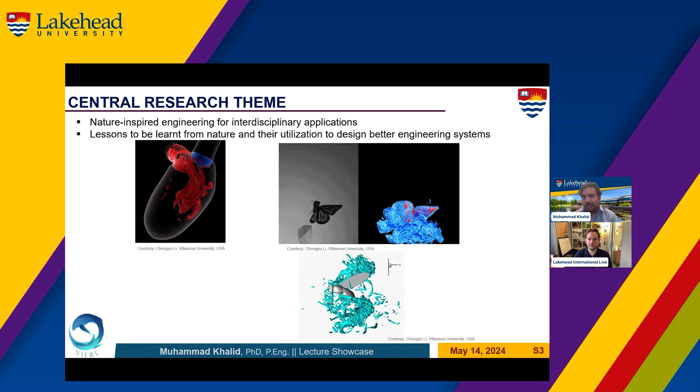And then you can see how we are looking at the aerodynamics of a butterfly, how it flies. At the same time, you can see a bee, how well it controls the vortex dynamics around it. The flow structures are very important to control to produce those necessary forces, which I would explain by taking an

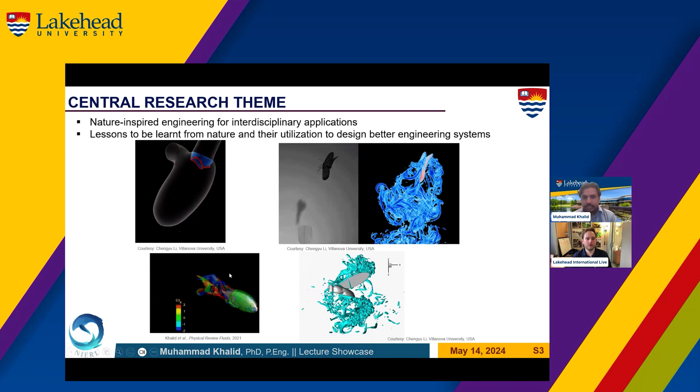example of a fish. And this is basically my work, which I'm showing you as a sample, where a fish is shedding some flow structures in the wake to produce the necessary forces. I would take this example to further go into my lecture.

So my story, how I went into this whole nature-inspired engineering thing, started with beetles and bugs. Back in 2011 or 2012, in the summer, I was a PhD student, and my advisor asked me to find a good research topic which has an impact on engineering systems in future. I kept thinking about different things, and I couldn't come up with anything for weeks and weeks.

And one day when I was entering the university where I was doing my PhD in Pakistan, I saw this beetle and I went after it. I was chasing this beetle for an hour or so just to make sure that whatever I observed is correct. The observation was that this beetle has its flapping wings, if you can see my cursor, under rigid wings.

And my observation was: how come this beetle can fly with two rigid wings with such a small weight? These rigid wings are not moving at a higher frequency, but these membranous, flexible wings are moving with a higher amplitude, with a more prominent motion. So I went after that, and I thought, this is a great PhD topic.

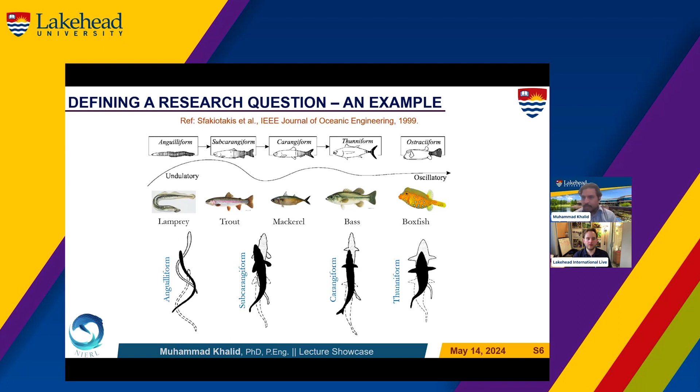And the second important question for me was: can we design a bio-inspired vehicle or bio-inspired underwater robot which can actually surpass the hydrodynamic performance of these fish? So in order to understand this thing, we have to study the fish first, right? So that is one example.

So I observed that thing. I had that question in my mind. And then I followed a scientific method. In the scientific method, first we have an observation. And that observation gives us certain questions in our mind. And then that basically leads us to a certain hypothesis. So you see, we have a specific research aim in our mind.

And in order to understand it further and find its answer, we either perform experiments or we do simulations, right? And after doing that, we draw some conclusions. So this is how we follow the whole scientific process in our teaching, in our research. And after having the conclusions, in order to make further improvements, we go into another question. So this cycle continues in the life of an engineer or a researcher.

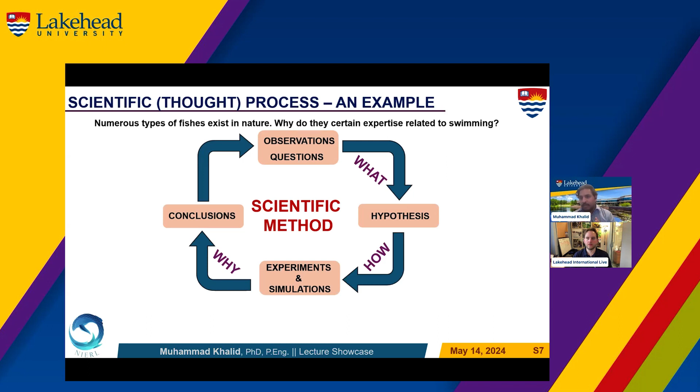So I would give you an example based on what I have just discussed on the previous slide. For observation and questions, I had this in mind: there are so many fish in nature. Why do they have certain expertise, physiologies and kinematics or motion, which make them great swimmers? So I made a hypothesis. I said, are the physiology and kinematics of different fish connected? So that was a research question in my mind.

And I try to find that answer through my integrated experimental computational approach. I would perform some experiments, and then I would also perform some computations in order to find the answers for my questions. And I came to a conclusion where I said, yes, there is a method to this madness, you see? The fish has gone through this whole evolution process to have a certain physiology, and they move according to what suits their hydrodynamics.

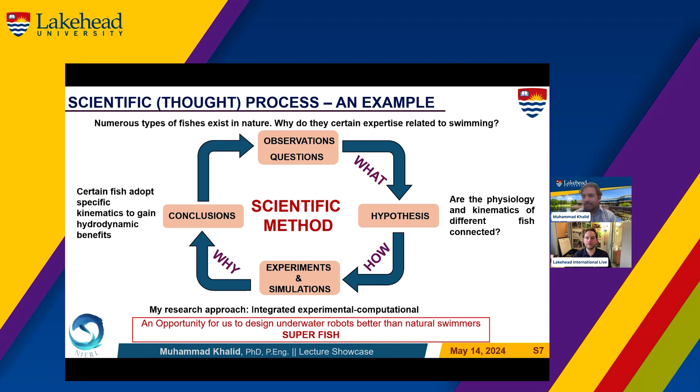So I would explain that this knowledge is very important for us to design a superior bio-inspired underwater robot, which I call a superfish. And as I say, sometimes we have to go for experimental approaches. Sometimes we have to go for computational approaches. And computational and experimental approaches have their own benefits.

For example, experiments are real time, more natural, and give us understanding about the system without making any scientific assumptions. But there are limitations. For example, I cannot tell the fish, can you please swim like an eel now, and at the other instant, can you please swim like a trout now, so that I understand what you are doing with the flow. So I cannot do that, you see.

So I have to go for computational approaches where I can describe any material properties for any system. I can describe any sort of motion or any sort of physiology. So my approach is that I would adopt experiments whenever I need to, and I would switch to simulations whenever I need to. The biggest thing is that we can really provide a deep insight into the behavior of the system using both approaches.

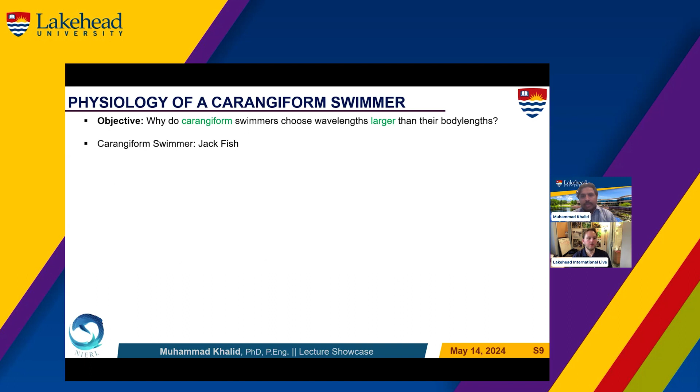So here is an example. We got this high-speed image reconstruction data for a jackfish from collaborators at Harvard University and University of Virginia. And then we reconstructed its whole geometry and its whole kinematics. And this is our solver. You can see, this is a virtual water tunnel, you can say. And we ran those simulations on a supercomputer.

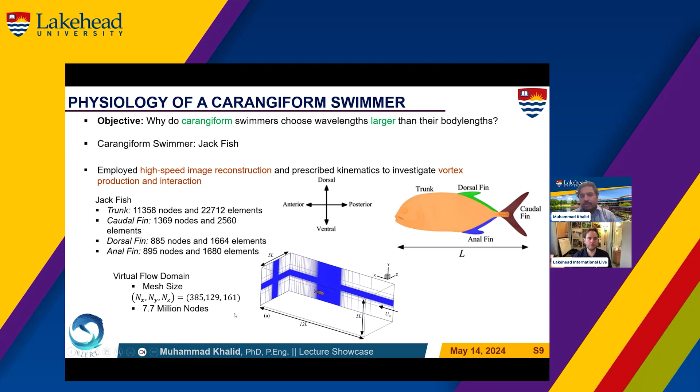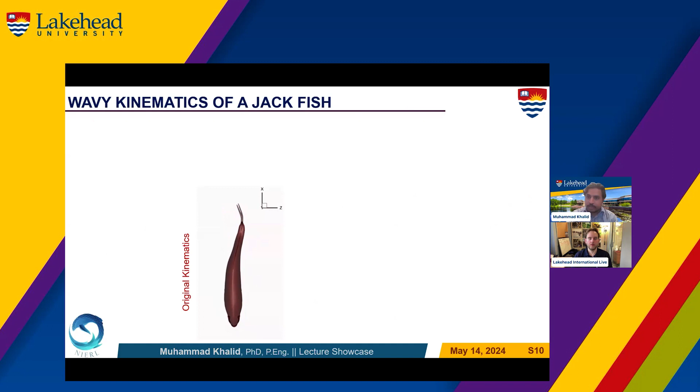And this is the original kinematics. And in order to change its kinematics, I have to follow a certain mathematical equation, right? So we have developed this mathematical equation. And based on this equation, you see here, for a certain wavelength, this fish following the mathematical expression exactly copies in its motion what we see in reality, right?

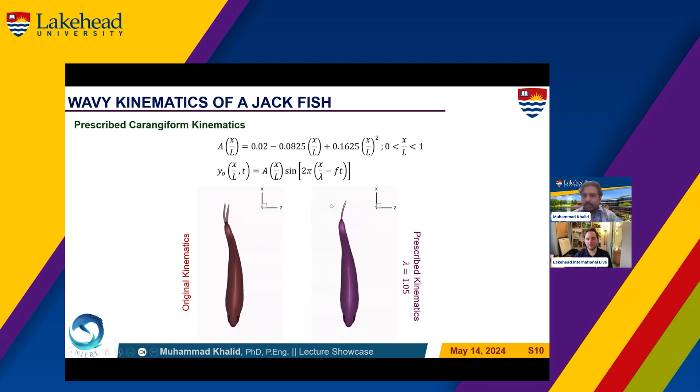So now it gives me the opportunity to change different parameters in those mathematical equations and see the behavior. So in order to convince the community that my mathematical expression actually works, I don't just need to look into it. I have to compare the two things.

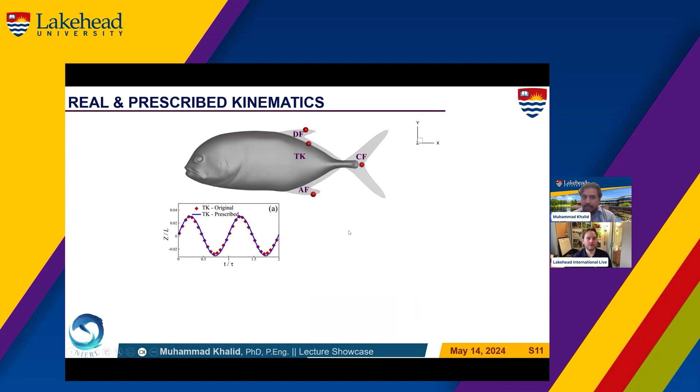For example, you see those 4 different points, and I'm seeing the motion with respect to time of those 4 different types, which I get from the reality, a real case, and which I get from the prescribed motion. So you see, we are matching the performance. So in terms of a mathematical model for the motion of the fish, it's very accurate.

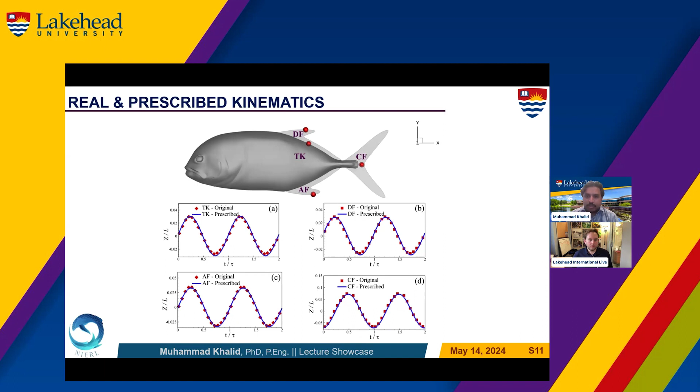So you see, I'm changing the wavelength of the fish, and I want to see why it is having this wavelength in reality. Does it give it some sort of hydrodynamic advantage? This is what I want to see. So we have basically looked into its thrust production capacities and the drag forces which it experiences when it swims.

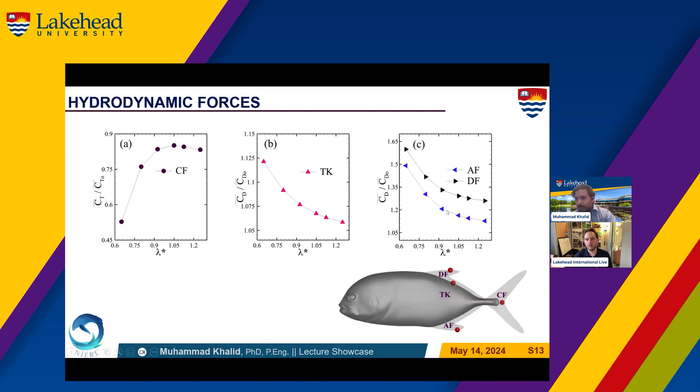So it means that nature is already providing us some sort of optimal solution in terms of connection between physiology and kinematics. So this is what basically inspires a natural design. At the same time, here I am looking at drag of the main trunk. I'm looking at the drag of the anal fin and the dorsal fin. And we are analyzing all their data to get some conclusions.

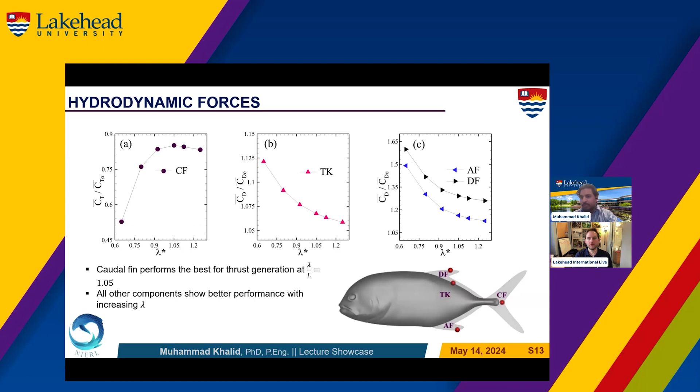And the conclusions are that the tail of the fish, which is known as the caudal fin, performs the best for thrust. And all other components, their drag reduces as this fish increases its wavelength. So it means that the fish has actually learned some lessons from that evolutionary process according to its physiology.

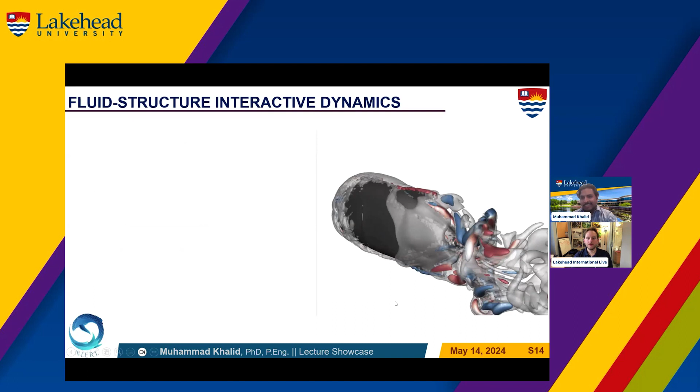So I'm just showing you the animation which we reconstructed from these simulations, and you can see all the flow structures around it. And those flow structures, I can tell you, the fish is expert in controlling all the big and small flow structures. And just to see what we extracted out of it as a researcher and engineer, I'm showing you one glimpse of what we studied for each flow structure here.

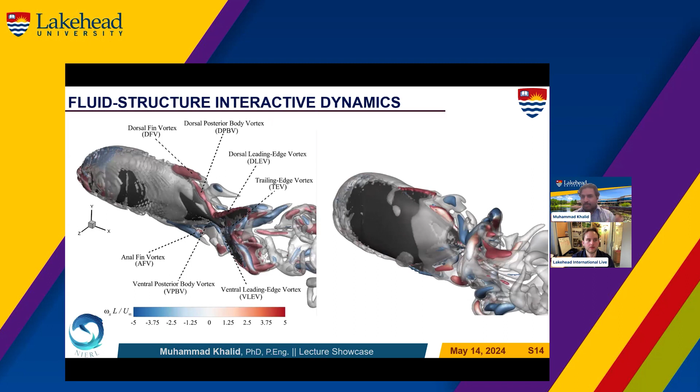So you see, we are looking at all those flow structures separately, and we are seeing how they are interacting with each other, how they are producing different sorts of forces, why they are going into a certain kind of sync with each other. So, I mean, this is the whole engineering approach which we followed over there.

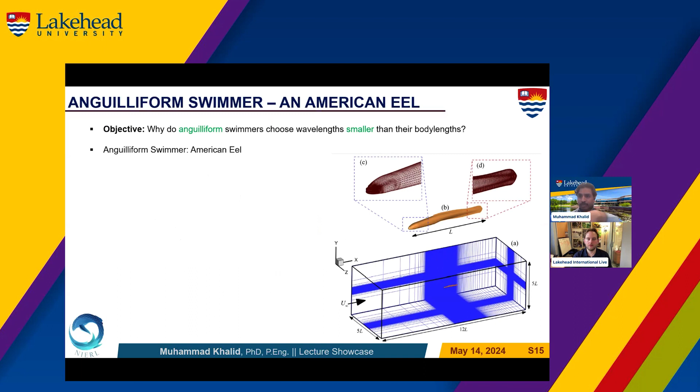We have also done the same thing for another kind of swimmer, which is an anguilliform swimmer. And now the example is an eel, which is like a snake. And the eel is very different from the previous fish because here the eel is using a very low wavelength as compared to its body length. So we also looked into this and we ran its simulations using a similar kind of mathematical equation which I showed for the previous fish.

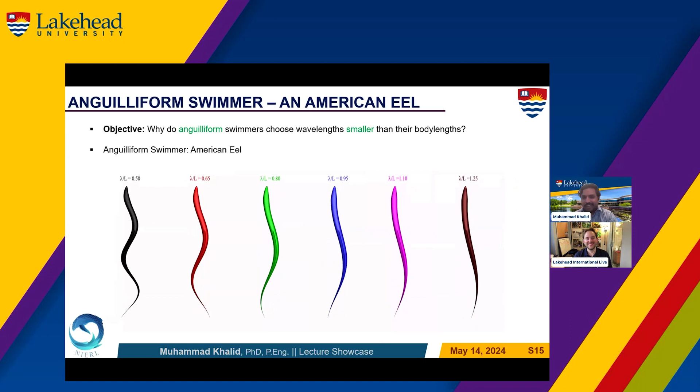I changed the wavelength, and remember that this luxury is not available to me in experiments. So we have run those simulations and we came up with the conclusion that the eel would swim with a lower wavelength because its physiology suits that kinematics in terms of producing more hydrodynamic advantages. Similarly, I have shown you the vortex structures for the previous fish. We have actually studied the vortex structure production for different wavelengths for this fish as well. So this is basically what engineering analysis in terms of propulsion is.

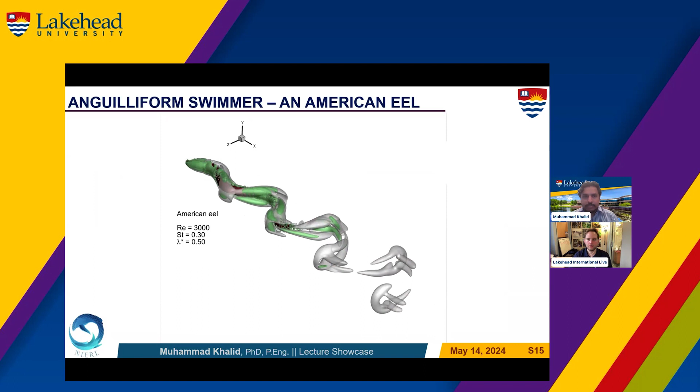We are also working on developing a manta ray bot at Lakehead University, and the work I'm going to show you now was done by a group of undergrad students with me in their capstone design project. They have just graduated. So you see, this is a manta ray, and we wanted to develop that manta ray bot.

So we are running some simulations. We are reconstructing the whole thing, the motion of the wing. So you see, we are reconstructing it into a simulation environment, and we are trying to understand how many forces are required or how strong the fin should be to push water from its wings, right?

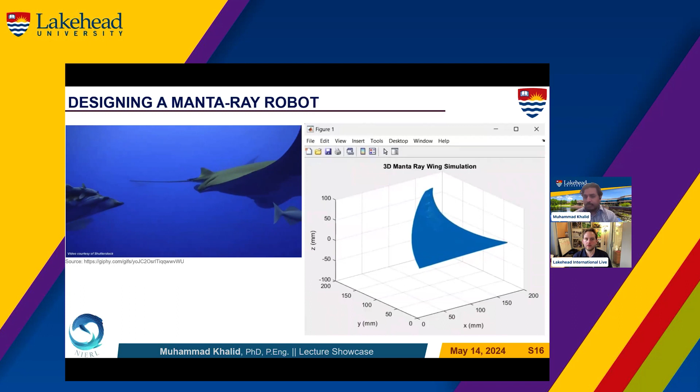And then we are looking at different, I would say, not very sophisticated experiments to produce that manta ray bot. These are the 3D printed parts, which we came up with after some conceptualization. And then you can see a not very sophisticated experiment. We could understand how much stress needs to be there and how strong the material should be for this robot, right? So we came up with our experiments in terms of converting weights into quantifying the stresses, and we came up with a factor of safety of 7.45 for our robot.

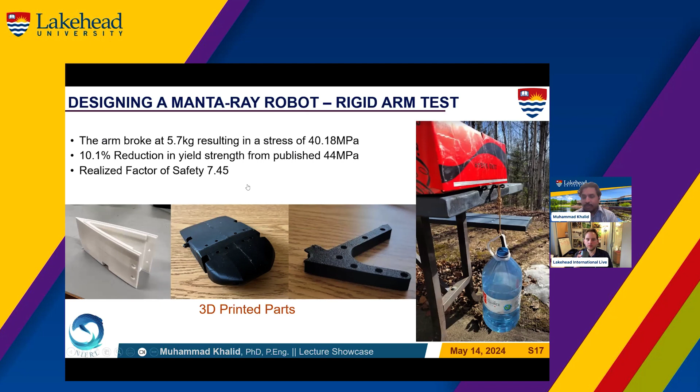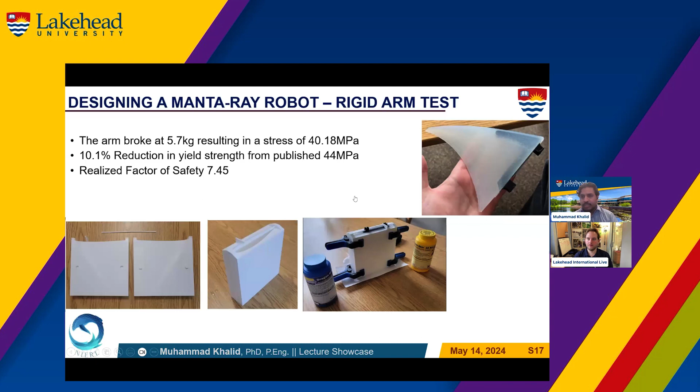And these are the wings, which were produced by the 3D prints of a mold. You can see the mold over there. And we have selected the geometry based on a real manta ray. We just scaled it down. And this is the final product which they made. And we just tested it in a pool as well. So we made a short video and it was running fine.

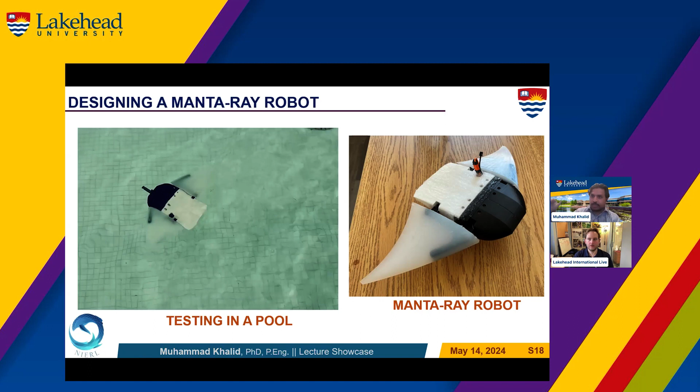But the biggest problem now as mechanical engineers for us was how to communicate with the robot when it goes underwater. So this is what we need to figure out next year. So anyways, this gives us some confidence that the approach which we followed worked in terms of producing propulsion with the required characteristics. I'll pause here.

So Dr. Khalid, we have a few questions before we get too far away from your discussion related to the fish and how they swim. The first one was, where do you do simulations, the experiments you talked about that are actually done with real fish versus computational ones? Is there a lab on campus, or do you go outdoors to a lab, or are there facilities that you or your colleagues use?

Yeah. So in terms of computational solver, we have developed our own solver that is in-house. I would show you another example when I talk about the energy harvesting part of this lecture. That solver is in-house, it is fully parallelized, and we run our simulations on Compute Canada facilities managed by the Digital Research Alliance of Canada. All my students in the lab are trained on using and developing that software. We are actually developing different modules of it.

In terms of getting those experiments, as far as the robot experiment is concerned, that is something which we do by ourselves. But to get that high-speed data, we have collaborations in different countries. So we don't need to do everything by ourselves. This is why we build partnerships, right? And this is what adds much more strength to our program. The experimental data is obtained from our collaborators, and the computational environment, yes, that is run with our own code.

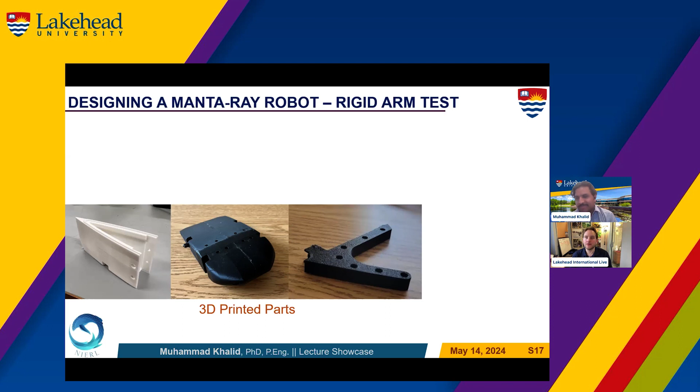It comes back to something you said at the very beginning of the webinar, making sure that everyone's approach is multidisciplinary. Yes. It's not just a mechanical and mechatronics engineering individual working on a single research project. It's a team of collaborators that are bringing their wealth of knowledge and expertise.

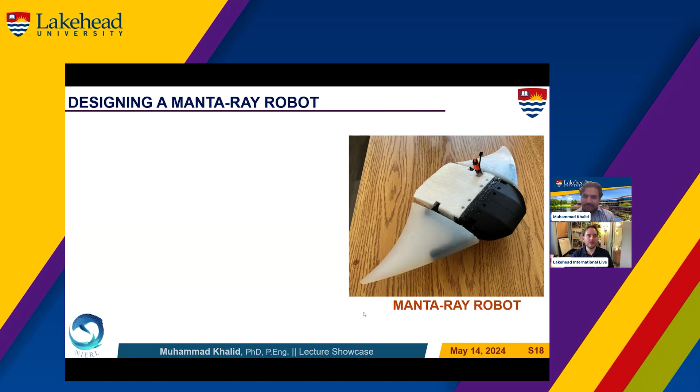Exactly. There's one more question in here, but I'm going to save it because I think it's going to be really interesting to be answered after you share a bit more about nature-inspired and energy harvesting. So I'll let you continue on in the PowerPoint you've developed so far. Sure. Thank you.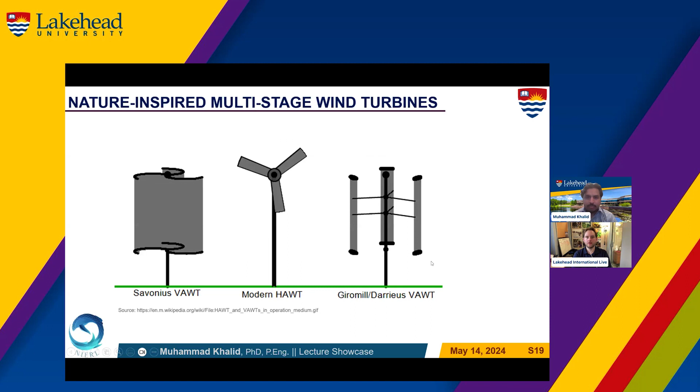So we are working on a very important problem related to the vertical axis wind turbine, the third one, at the rightmost position. There is a bigger problem related to this wind turbine, and it relates to its self-starting capability. Most of the time, people would have to attach some sort of pushing mechanism to make that turbine run, and then it would be able to produce some power.

So we want to understand how this turbine interacts with the incoming air so that we can improve its self-starting ability, and we are looking into that using our computational approach. In terms of answering that question, I would get back to the fish school. Here we are seeing a side view of a fish school. Whenever fish move in those configurations, they move really fast. If you look at their rotational speed, they move really fast.

So I thought, we can have the same concept and introduce something like a multi-stage wind turbine, where we have added another set of rotors within the primary rotor. And we performed simulations, looking at how different flow structures are produced by different configurations of vertical axis wind turbine, and whether having another circular arrangement of rotors inside the primary rotor can improve its self-starting performance.

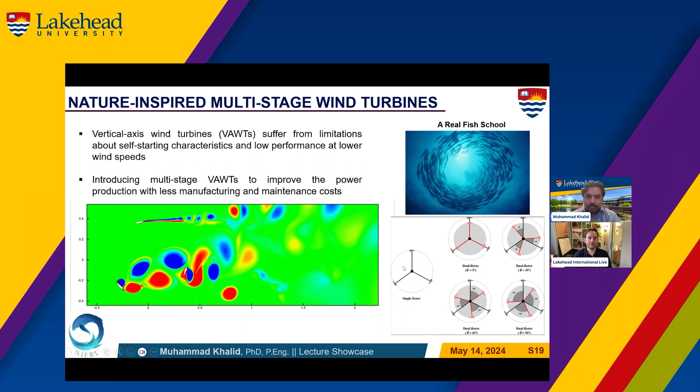Because of the time constraint, I would not go into the results, but I can show you one animation of the flow structures produced in the wake of a single rotor vertical axis wind turbine. We have already published this paper, and up to 15% improvement in self-starting ability was obtained by introducing this rotor. We are going to test it in experiments very soon; one of my grad students is working on it. We hope to report those results by the end of this summer.

Other research we are working on, mostly using computational simulations, is based on how different structures interact with different fluids, like water and wind. And we don't always have to produce power at a bigger scale. We have to look at micro power generators as well, so we can use them in different scenarios. Sometimes we have small scale applications; sometimes we just have to power a wireless sensor, not a building or a home. So we are working on that as well.

So I would show you some examples. Here you can see a wing inside a wind tunnel. In response to its interaction with the wind, it can produce a certain amount of voltage. I have taken this from YouTube just to help you understand the process. This is known as the flutter phenomenon, where the wing does this thing.

Then you can see there is a concept which is being evolved now, where we can use similar wings at the riverbed or in the bed of the lake. We are also working on developing this sort of farms. And then finally, I would show you one conceptual figure where people can develop those farms and produce a big amount of energy from the waves of rivers and oceans.

So in order to do that, we have to perform either experiments or computations. Because my own research is mostly on computations: the previous models are mostly uncoupled. Uncoupled means that they would solve the fluid part differently, then they would solve the structural part at the next time instant, then they would solve the equations related to electrical energy in another time instant.

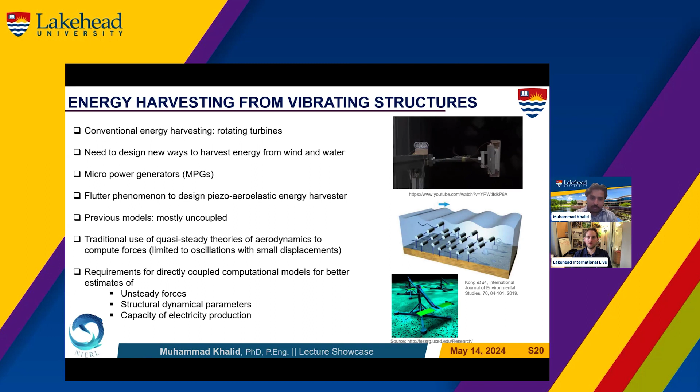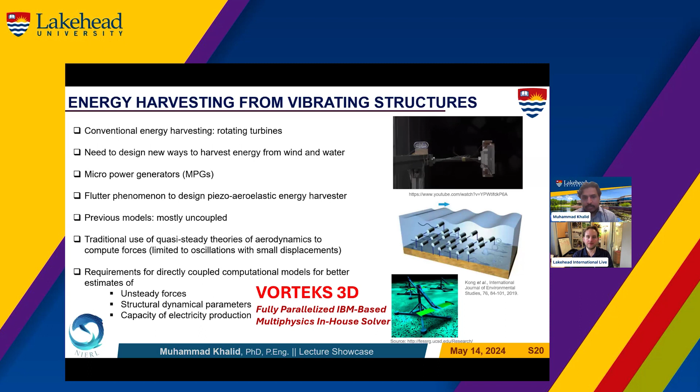So we have developed this in-house solver, which is VORTEKS 3D, I have named it. And this is a fully parallel immersed boundary method-based solver, which is an advanced computational technique to look at fluid structure interaction problems. We are using it for fish propulsion and for energy harvesting systems. And we are also enhancing its capability in terms of looking at different multiphysics problems. A few examples I would show you in the next slide.

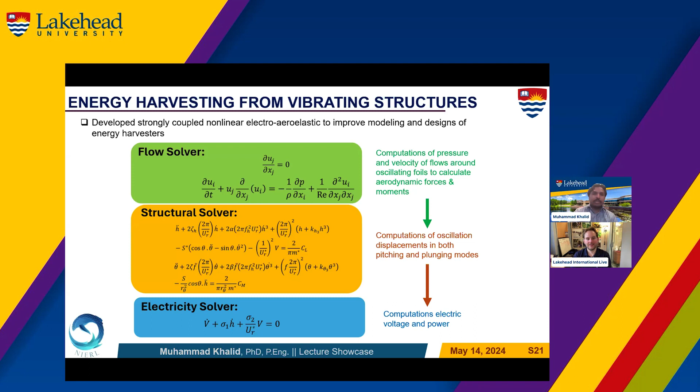So when I say we have developed the solver, I would just show you the equations which we have actually solved. Because mathematics is the language of engineering, right? So these are the equations. I don't want to explain all the differentials and integrals. This is something which we definitely love to do when we see you in the class. So that would give us an opportunity then. But we actually solve those mathematical equations to study those systems.

So some of the other examples which you would find in engineering design, you might have seen it. This is a whale wing inspired blade design for big wind turbines. People have reported that a reduction of 32% has been seen from this nature inspired design in a big wind turbine. If you attach some sort of owl wing inspired appendages to a wind turbine blade, it can significantly reduce the tonal noise, which is causing a lot of mental health related problems for the communities which live near those wind turbine farms. So owl inspired designs of blades, that is another example.

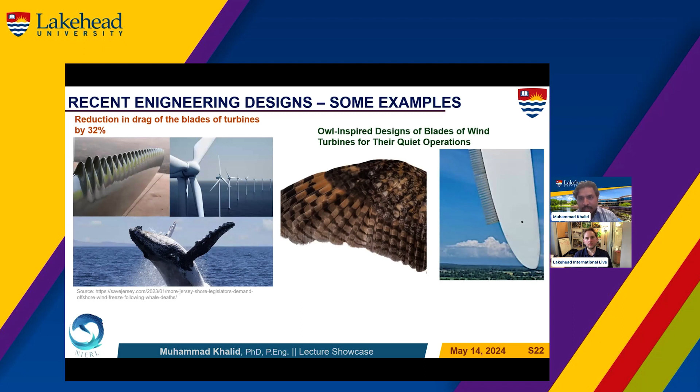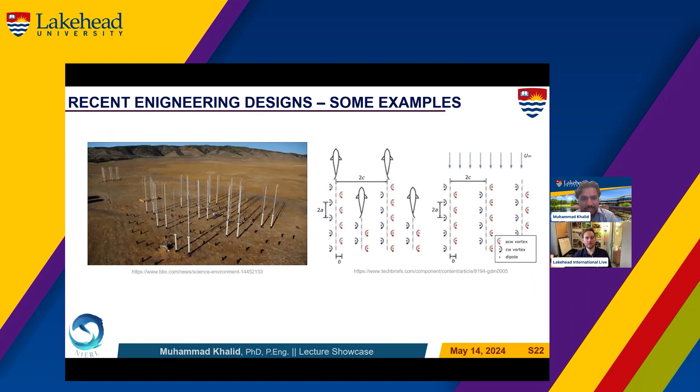And this is something which I just took a snapshot from a news article which reported that. And there, again, the fish school: people are designing wind farms using the configurations of fish schools. So this is another example which you can find in different areas.

So coming to the multi, inter, or transdisciplinary approaches, which is a basic takeaway from my lecture, I would say. The difference is that in multidisciplinary things, we maintain the boundaries between different disciplines, for example civil engineering, electrical engineering, mechanical engineering. If we are developing a collaboration between different researchers, mechanical engineers would say, I would only focus on this thing, which is mechanical related. And the civil engineering person would say, okay, this is my domain, I'm not going to cross it. But you are working together, one is providing an input to the other.

And for interdisciplinary things, boundaries are blurred, just like an example of a stew. But for transdisciplinary things, you don't know what the boundaries are. It's completely a mixed effort, right?

So usually when I teach courses, this is my first and foremost advice for students: build fundamental knowledge. If you understand the fundamental concepts, it would become very easy for you to deal with different scenarios, even with different systems coming from different backgrounds. For example, Newton's second law cannot be violated, right? Similarly, Kirchhoff's voltage law cannot be violated. The energy principle cannot be violated.